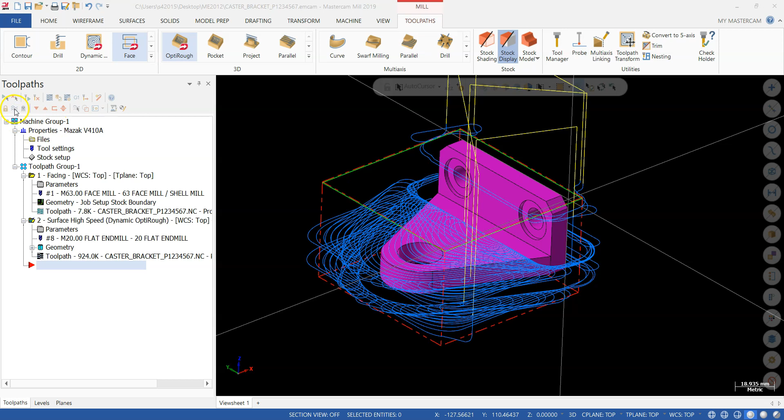Now move to Mastercam. Before that, let's make the toolpath invisible. So the surface I'm talking about is actually this one. Let me also make the containment and the axis invisible. So the surface we are looking at is this one.

To remove this surface, we can simply command the cutter to move from here, all the way to here, in a straight line. To do this, just use contour, then click on edge.

I will be cutting from the right to the left, so just click it - this arrow should point from right to left. Then click OK. Now go to the tool - I'm using T3, in this case a 16 flat end mill.

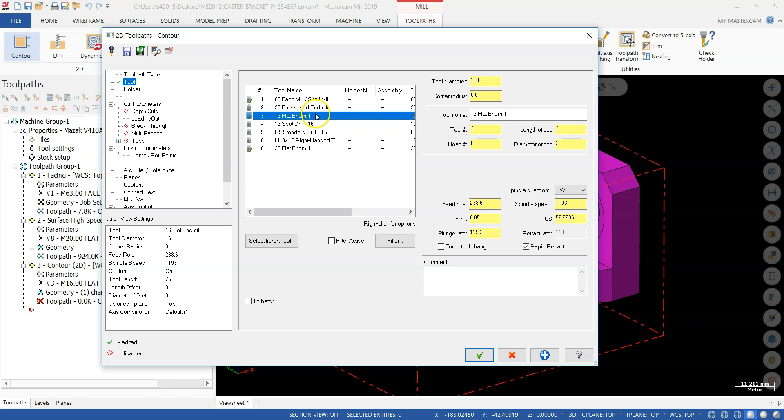You can go to the cut parameters. Since this is only cutting the floor, I will not do anything with the compensation - I will be using computer. For left and stock to leave on wall, I will make it 0.5.

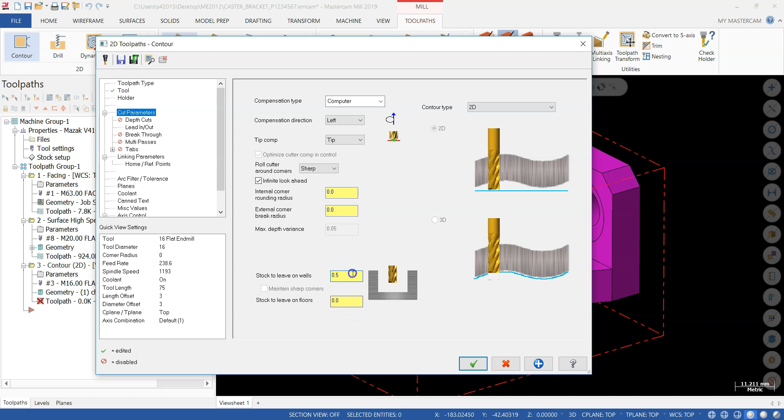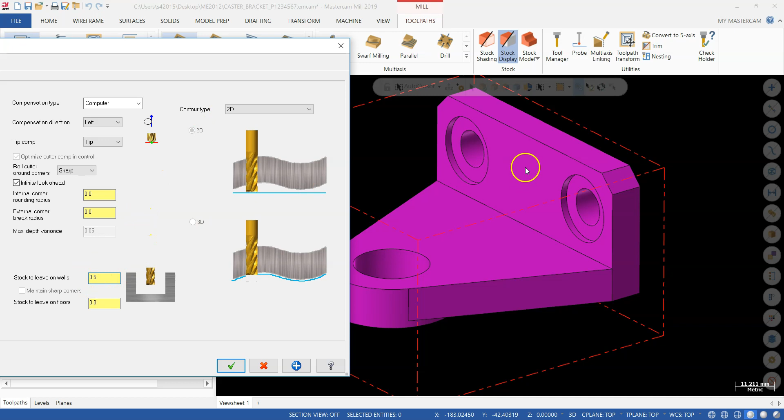Why 0.5? Because later on I will still have another operation just to finish this wall. If I finish it now, there will be some issue controlling the surface finish. To avoid this, I will split it into two operations - cut the floor first, then follow with the next operation just for the wall. To avoid cutting the wall, I give a little extra, like 0.5, so the cutter will not touch it.

And for the floor, definitely will be 0. Now I go to depth cut - since this is finishing, no depth cut. For the lead in, lead out, I will use tangent. There should be no radius, so 0. Length is 100%, then copy to the right.

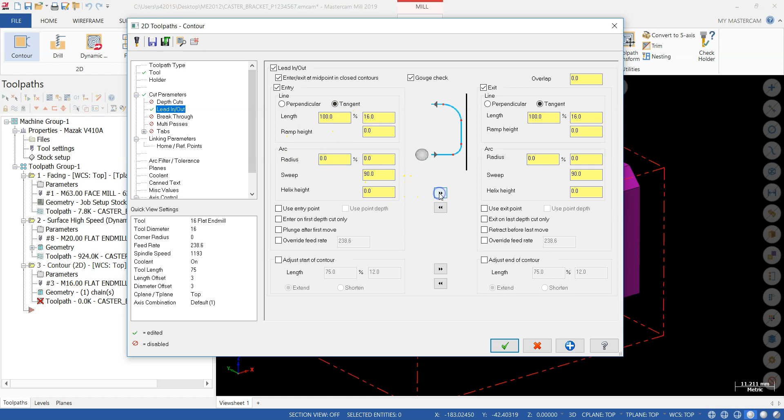Now go to multi-passes. You know the cutter you're using is only 16mm, which is much smaller than what we need to cover the entire surface. So I activate the multi-passes. The usual practice is to slowly increase the number, or calculate how many passes are required. For this case, I've used 5 passes to cover the entire surface, with a spacing of 13mm.

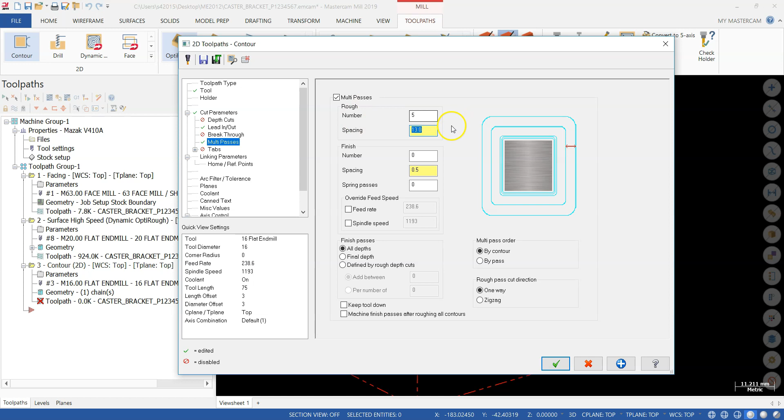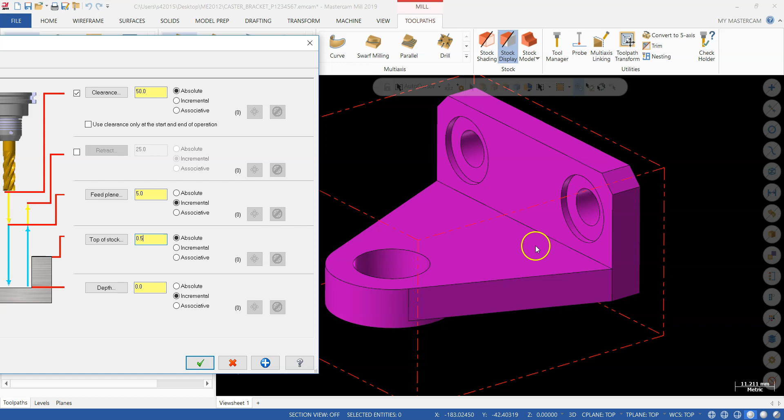Next is the linking parameter - same thing, I will activate clearance at 50 absolute, retract unchecked, feed plane will be 5. The top of stock is very clear - it will start from here as 0 and cut down to this. So I will change this to 0 absolute, and the depth will be absolute.

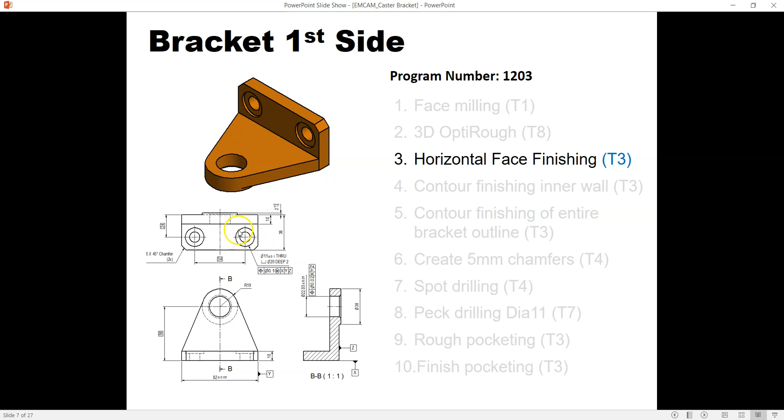The good thing is when I click on this edge, Mastercam captures this depth, giving me -28 absolute. If you want to double check, you can go back and check this value - this is 38 minus 10, which equals 28. In this case, I have no problem with this, so click OK.

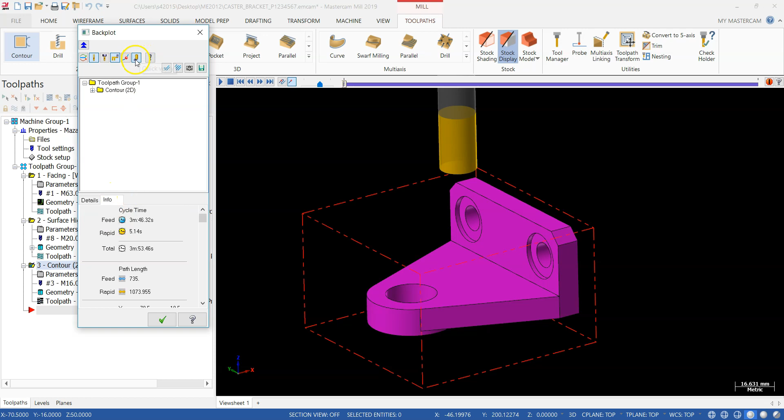What you'll observe here is the cutter moving in the multi-passes with the 5 passes I defined. To double check, just click on Backplot, then click this quick verification and click Run. Going to the top view will also be good - you can see that it covers the entire surface.

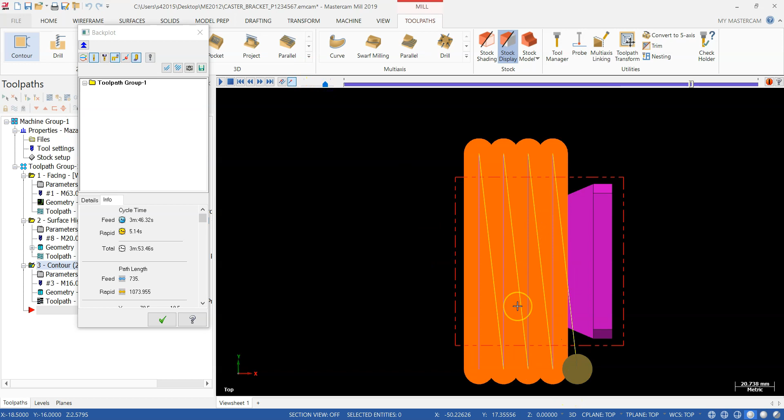You can see that the part will not cut up this wall - in fact, this is the 0.5 I just defined. We will have another operation just to take care of this particular wall. If you have completed this and are happy with it, save this operation and we will move on to the next one.